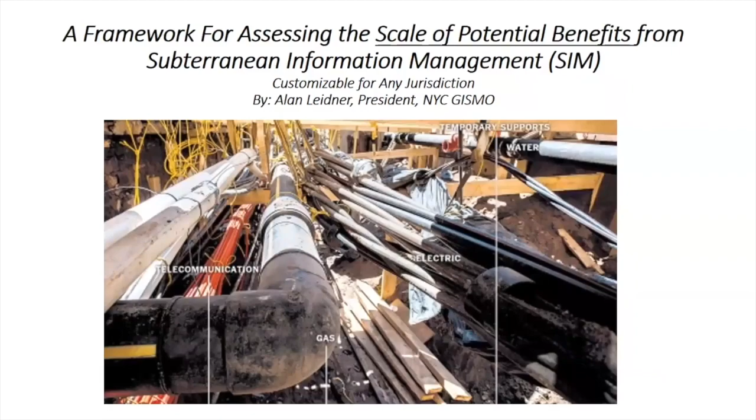So let's go, just an overview of what we're talking about in terms of underground infrastructure. It's all those pipes and whatever under the street, but it's also the underground environment, which is from the pavement level down to the different soils, to the water table, to the hydro elements that are underground as well. And those are key to the longevity of the pipes and the underground infrastructure. So these are two good images that show our area of concern.

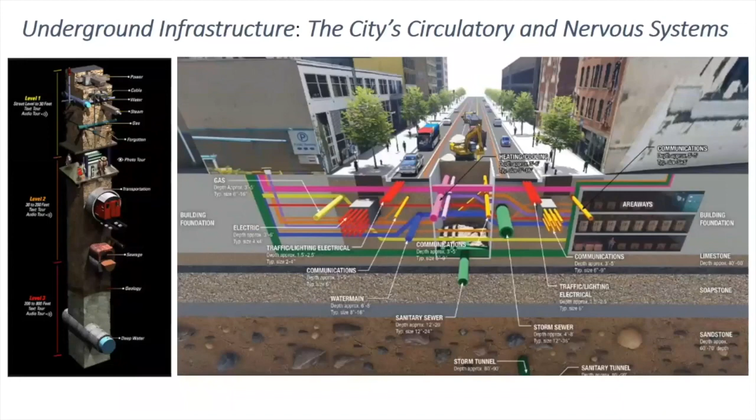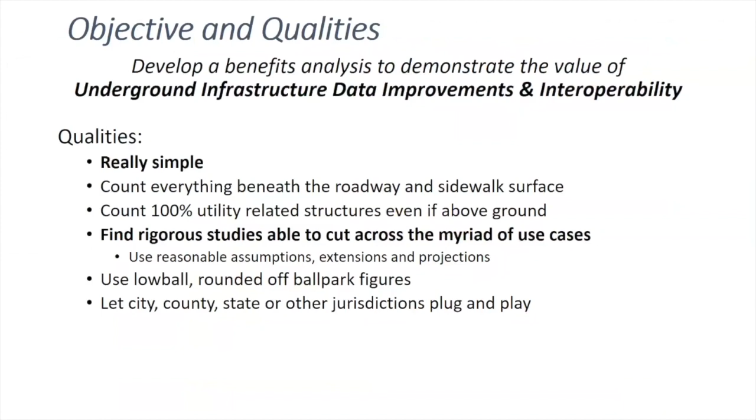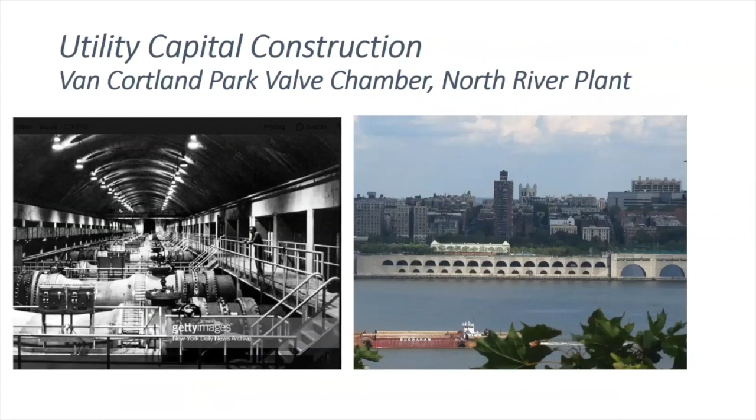So what do we mean by underground infrastructure? Four major elements. One are the very big capital projects that you all walking down the street would know about, things like the valve chamber at Van Cortlandt Park, or the wastewater treatment plant in North River. These are both in New York City. Both are probably multi-billion-dollar projects. They connect into all the underground infrastructure. And even if they show their heads above the street surface, we consider these to be underground infrastructure elements that we count within our cost-benefit analysis.

The other is, and you know this a lot better, all the drilling that goes on in the street when they want to make a repair, or where there's an emergency, or where they have to lay new pipe because old pipe is aged out or starting to break. There are 240,000 excavations in New York City on an annual basis, which is about 30 to 40 per mile per year. So constantly accessing the underground, with all the potential for accidents and mistakes.

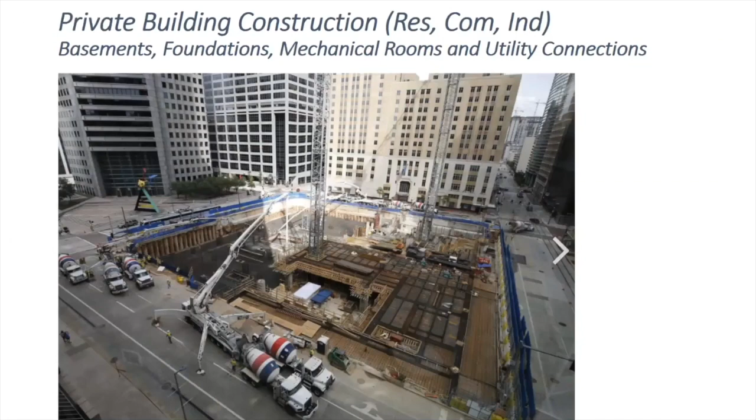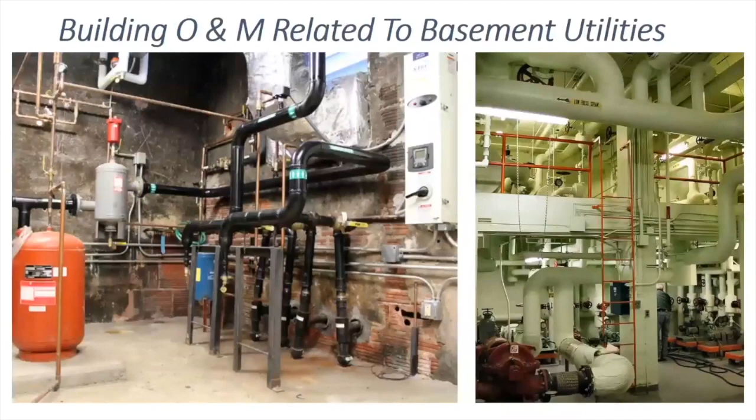Another big element here is that every building that you see in the city has a foundation and has a basement. All those elements are in direct touch with the underground soils and also connected in with the underground network. So we consider everything below the first floor of every building to be part of the underground environment. This really expands how we think about this. And we also think about all those basements and all those utilities in the basement after the building has been constructed. This is all in the underground environment, so we count it.

Okay, so what does this mean in terms of gross money? Just taking some figures to get a scale for how much money is spent annually in underground infrastructure, from the General Building Construction, an online data source, from the Department of Environmental Protection budget, from the Department of Transportation, because we count street surface, from Con Edison, from the MTA, leaving out a bunch that we just didn't include because once we started to scale up to about $10 billion, the rest was irrelevant.

It could easily have gone to $15 billion or $20 billion. But when you start to work that number through, you find out that in New York City, this $10 billion translates to about 1 million people per $1 billion spent, and to about $1,000 per person per year for infrastructure that is spent, just to scale this, because then these become metrics that can be used elsewhere.

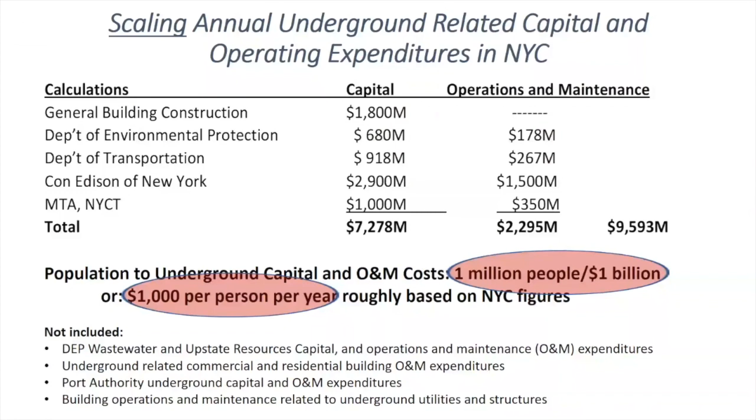Okay, so during the course of the Open Geospatial Consortium studies, we came up with a bunch of major use cases: routine excavations, major excavation, infrastructure operations and maintenance, emergency response, disaster preparedness, smart cities opportunities. And many of these had many sub-areas. I can tell you that to try to parse out all the different use cases and sub-use cases and work processes and create a cost-benefit analysis from that is almost virtually impossible.

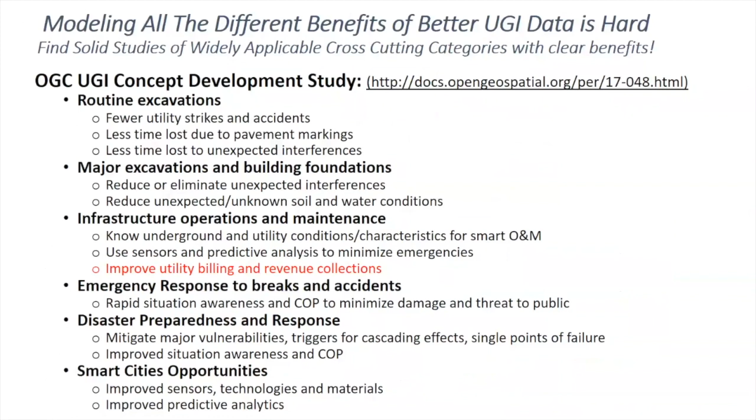And then to do it for 7 different types of utilities and for the circumstances in each individual city, it's just overwhelming. So the goal became, how do we create a simpler way of looking at this? So the way was to break it down into 5 different categories where we could find studies that would allow us to aggregate savings percentages. And they broke down to improved data accuracy, completeness, and timeliness as one, improved data interoperability and accessibility, and this is what the Open Geospatial Consortium Interoperability Project addressed, and infrastructure extended life. These are the items that we really felt we had pretty strong and reasonable metrics to deal with.

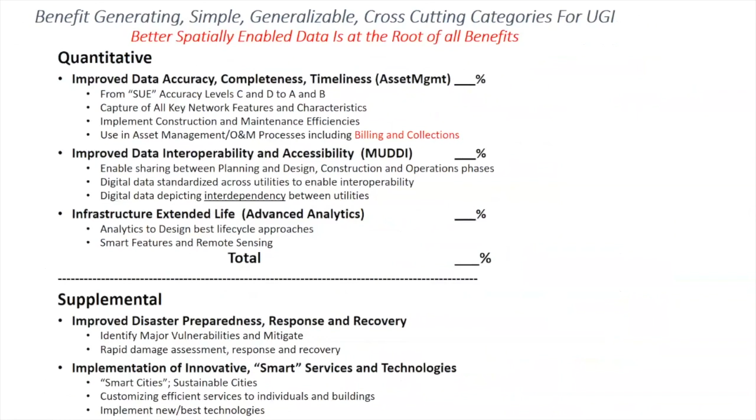Then we had 2 supplemental categories: improved disaster preparedness, response and recovery, and implementation of innovative smart services and technologies. I'm going to go through each one of these, and you'll see where we got numbers from and where those numbers lead. Okay, so first, we had guiding studies. Those were critical. We found, really fortunately, important studies that gave us numbers we could be confident of.

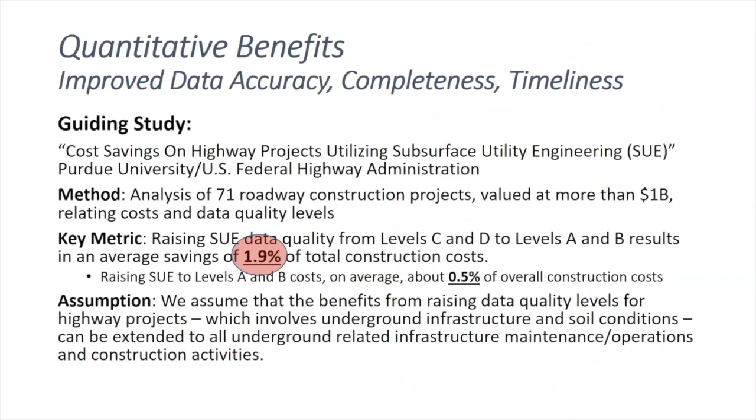So the U.S. Federal Highway Administration, Purdue University, came out with cost savings on highway projects using SUE, or Subsurface Utility Engineering. They discerned that if you had good data about underground infrastructure, you could make your highway projects less expensive. And they had 71 roadway projects. This was a very rigorous study. I believe it's a couple of 100 pages, so go take a shot at it if you want. Their metric that they came out with was a savings with better data of 1.9%. So keep that number in mind.

Okay, another guiding study was cost analysis of inadequate data interoperability in U.S. capital facilities industry. We got so lucky that we found these studies by NIST, National Institute of Standards and Technology, a reliable organization, and they did 105 structured interviews with 70 companies. So this was very rigorous. And what they came out with was, when you have a major construction project, by having all the data that goes into that project be interoperable, you have a 1.8% savings coming from that for each project. Now, that's a lowball figure, but it's a number we can use. They add up. By the way, this is just some of the other sources of data for more focused kinds of use cases and projects, but I won't go into that detail now.

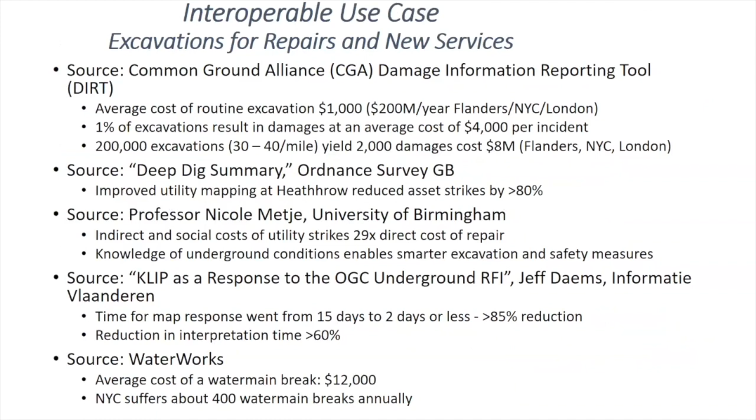I want to get through with this, which is the third leg of our cost-benefit analysis here, another cross-cutting category of, if you've got all the data from example 1 and example 2, and it's high-quality data, and it's interoperable data, and you can do superior analytics on that, you can put it into an asset management package, and just go to town on it to analyze the best way of managing your networks. There are studies. They don't give a clear-cut figure.

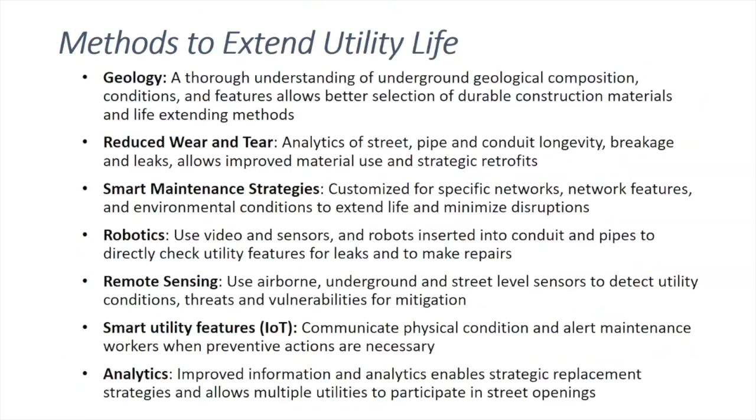I have Bob Mankowski here from Bentley, who I don't know if you've confirmed my estimation, but I'm saying you can extend the life by 1 year in a 100-year life cycle for a particular infrastructure. And can you say, yes, that's a reasonable number? Excellent. Okay. So I won't give you all the reasons why, and we'll just work out what that comes to.

It comes to 4.7% savings for the entire realm of infrastructure spending, both for capital projects and for maintenance and operations. So if you take a generic $1 billion and you multiply 4.7%, you get a $47 million benefit per billion expended. In New York City, the 9.6 billion number we had from an earlier slide, that comes to $450 million in annual benefits using conservative numbers based on rigorous studies.

What that means per person is about $47 in savings using improved underground infrastructure data, $47 per person. So you can multiply that by your population or by the size of your city's capital budget and actually come up with a number you might have a chance of defending in front of your Office of Management and Budget.

Just very quickly, I want to bring up two additional cases that just add dressing to the three numbers that have been presented to you. One is that FEMA came out with a study about the benefits of mitigation for disaster response and preparedness. And they came out with: for every dollar spent on mitigation, you get $6 back. We consider improved data to be an element of disaster mitigation. And so what you could basically say is every penny you spend on improving the underground infrastructure data is a mitigation expense that actually pays you back $6. This is sort of like on another page of your analysis.

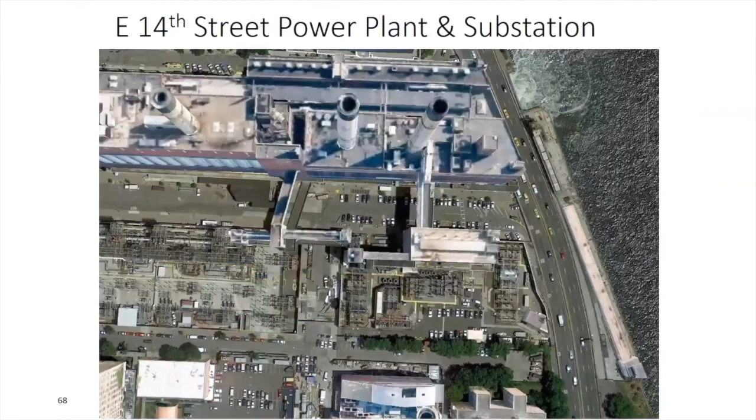And just an example of this is because we did not have good analytics on the East 14th Street substation, when that went, and Wendy showed it to you, NYU Medical Center also flooded. The bottom line is New York City lost billions of dollars because we did not do the proper analytics, because we did not have the proper data to analyze the effect of a storm surge on the city.

And the final point I will make here is that there's a whole element now looking forward of smart cities. This is from a study called Smart Cities and Cost Savings by a series of private consulting groups. And they basically found that the future of smart cities largely resides in smart infrastructure, smart mobility, and so forth. That comes to, for a mega city, which New York City is, $45.7 billion per year in the future as all these technologies get developed. So that's additional icing on the cake for a cost-benefit analysis.